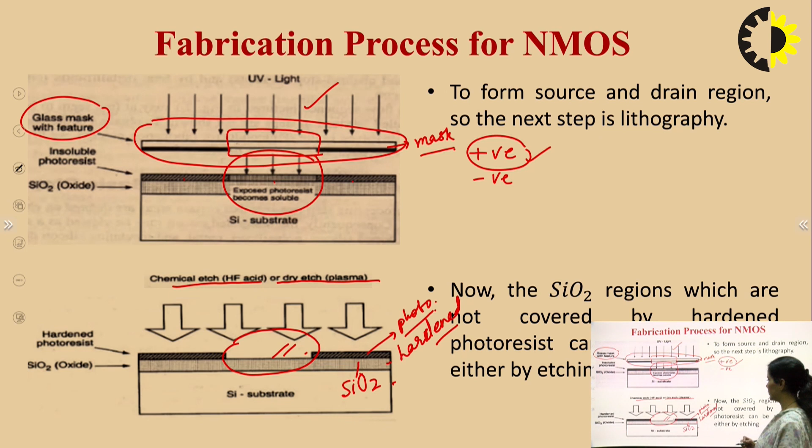Now the SiO2 regions which are not covered by hardened photoresist can be etched away. Finally, the photoresist layers on other portions are also being etched, so you can see there is no more photoresist. The remaining photoresist can be removed by using another solvent. So from all of the surface, the photoresist has been removed.

Now deposit a layer of thin oxide in order to form the gate oxide of the NMOS transistor. Now we have to fabricate the gate. For fabrication of the gate, we are already aware that a thin oxide film deposition has to be done. So again, through the thin film deposition process, a thin oxide is grown all over the surface, all over the SiO2 oxide.

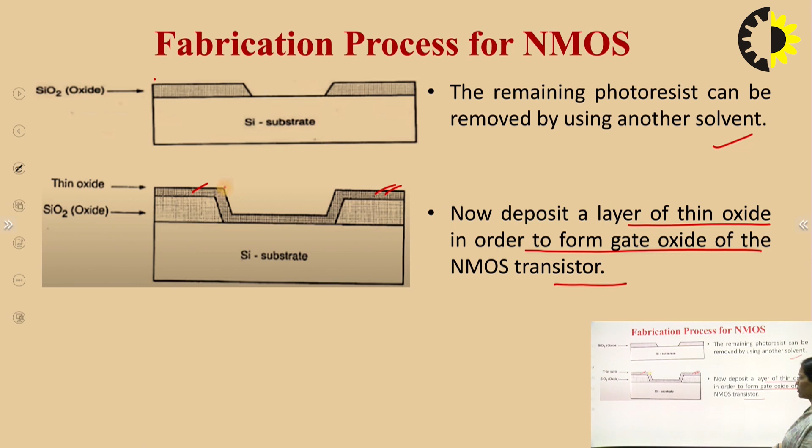Now on the top of the thin oxide layer, a layer of polysilicon is deposited. As we can see, this was the SiO2 thick oxide layer. Through patterning, the thick oxide layer has been removed from this portion. Now this is a thin film of oxide layer, thin oxide. Again, above the thin oxide, this is the polysilicon. And this polysilicon layer is used to make interconnects, to form the metallization.

So now on the top of thin oxide, a layer of polysilicon is deposited. It is used as gate electrode material for MOS and to interconnect it. So basically this polysilicon is used for making the gate electrode. Now through etching, we have to define the gate over here. So all the portions of the thin polysilicon layer except this portion are removed through etching.

So this is the final result. As we can see, in this particular portion where the gate has to be defined, we are left with the polysilicon layer. From all other portions, the polysilicon has been removed. So now this is the final structure. This is thick oxide, this is thin oxide, this is the thin polysilicon layer, only in this portion, because the gate electrode has to be defined only in this particular portion.

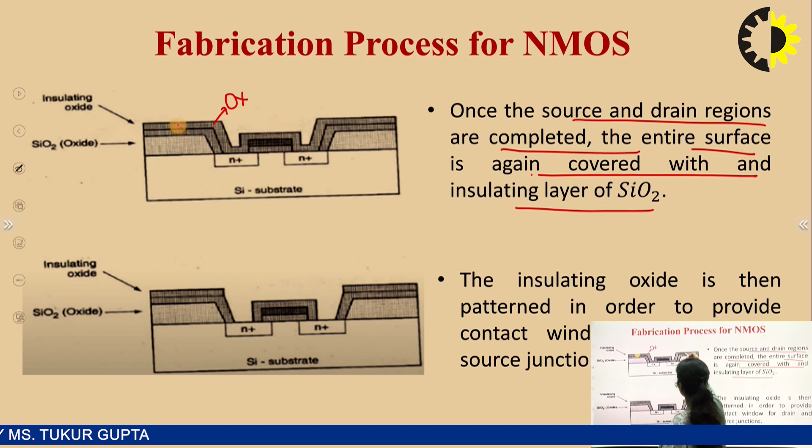So in this process, starting from the mere p-type substrate, we are now done with the two source and drain regions. Now what will be the next step? Next step is to make the interconnections of these regions. Once the source and drain regions are completed, the entire surface is again covered with an insulating layer of SiO2 to form the interconnections. So here we can see after the achievement of these two areas, again the insulating layer, that is the oxide layer, is grown all over the surface. So we can see here is the layer grown again.

The insulating oxide is then patterned in order to provide the contact windows for drain and source junctions. So here you have to open the contact windows. So for opening the contact window, what are we doing? We are etching the oxide layers from these two regions. This is the insulating oxide.

Now the surface is covered with evaporated aluminium, which will be used for making the interconnections. Now after this step, what are we going to do? We are going to cover this whole portion using the metal layer. So here this is the metal layer, and it is covering the whole surface. Now we have to make the openings for gate, source and drain.

Finally, the metal layer is patterned and etched, completing the interconnections of the MOS transistor on the surface. So in this way, only these areas are used to make the interconnections. The metal contacts can be seen only in these regions. So this is how the final product looks.

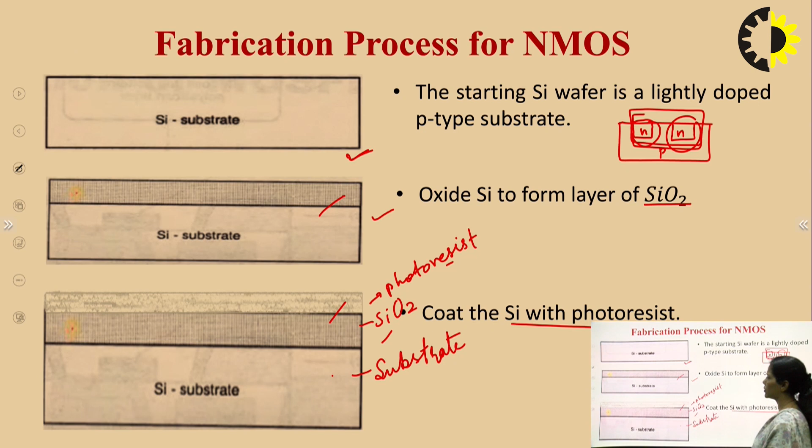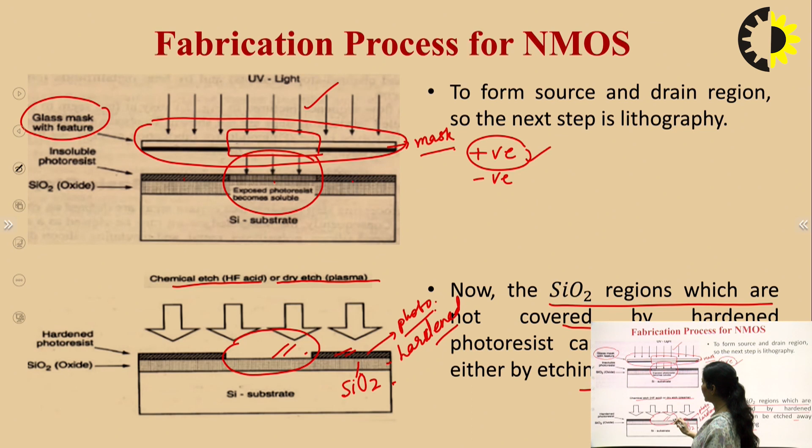Let us again give a quick recap. Starting from the substrate, first of all the oxide layer was grown, and then the photoresist layer was deposited. Then it was patterned to make the openings for source, drain and the gate regions. Now again the etching was done and the thin oxide layer was grown. On the thin oxide layer, again the polysilicon layer was grown to make the interconnections. And then it was used to form the gate.

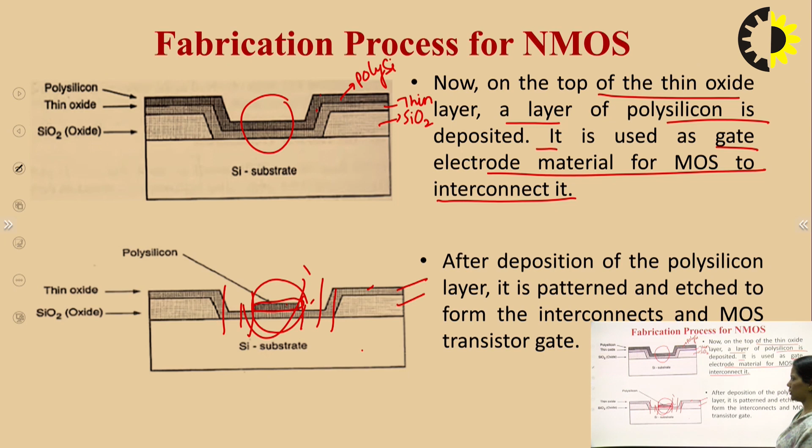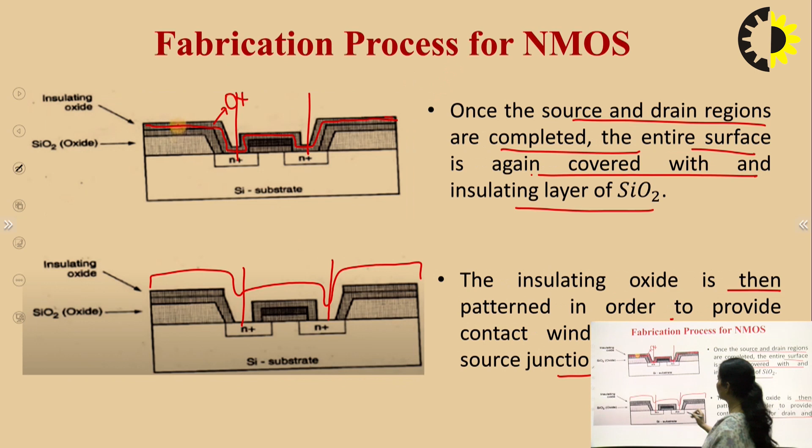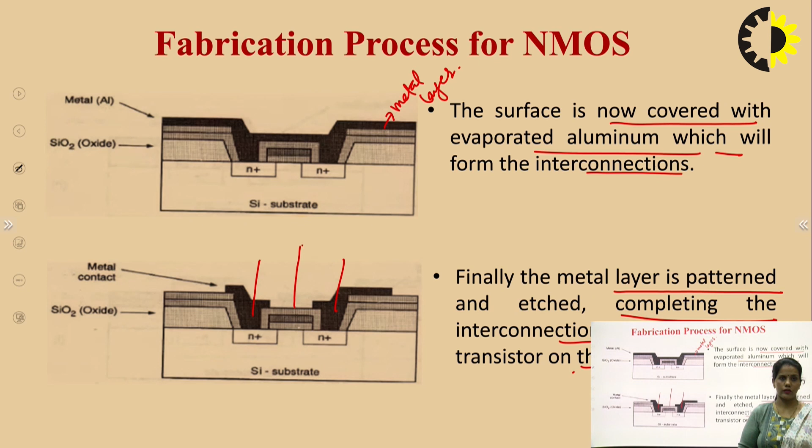So to make the gates, the oxide layer from the other regions is also removed. Now again, through these openings, source and drain regions are defined. After defining the source and drain regions, again the insulating oxide layer is grown in order to make the metallic contacts. After this oxide layer is grown, it is etched from these particular areas where the metallization has to be done. And in the final step, the metallic layer is deposited and again etched to give the external connections to these areas, source and drain. So this was the whole process of NMOS.

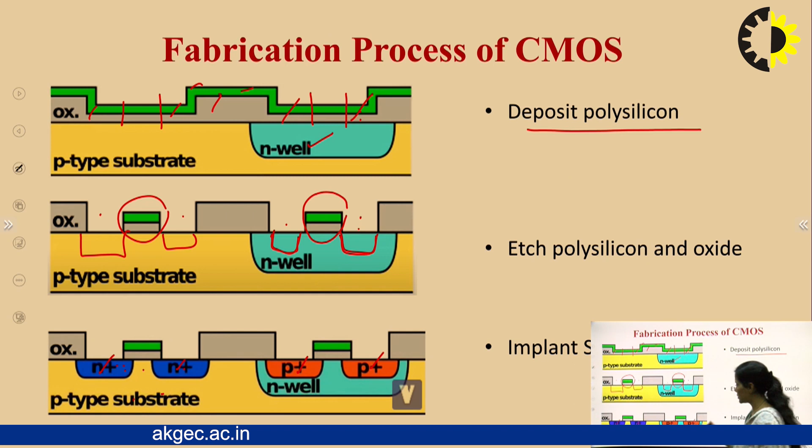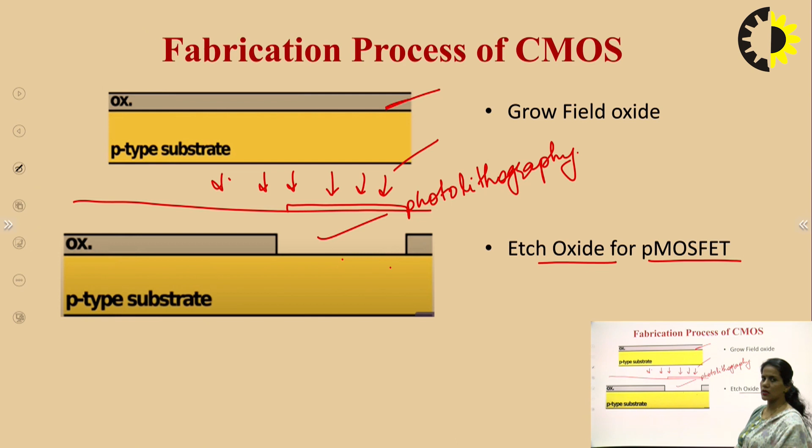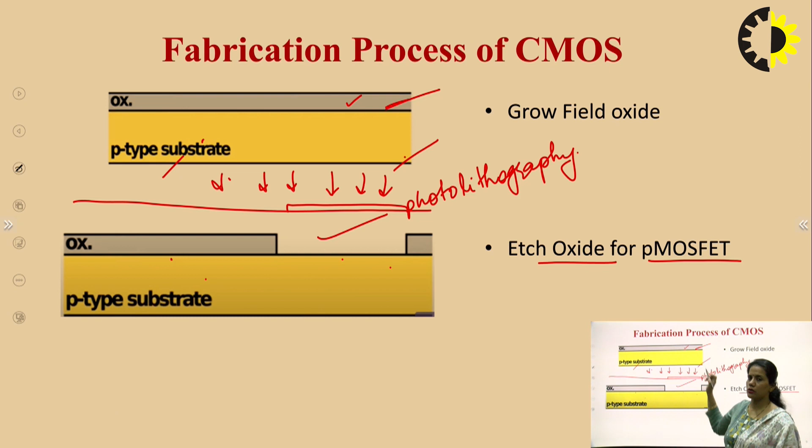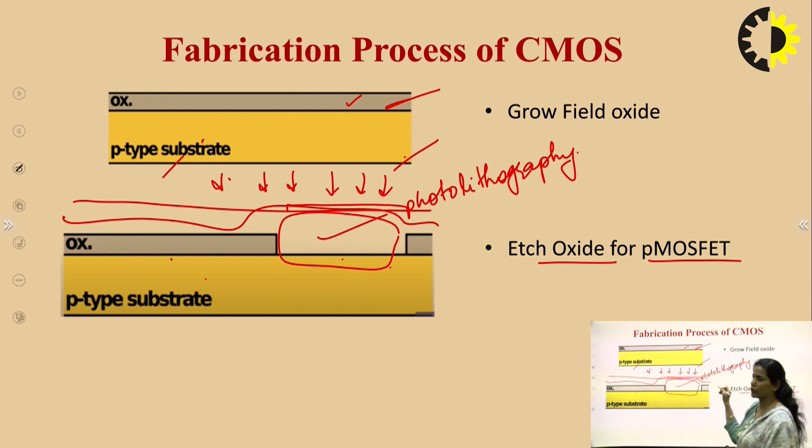So let's give a quick recap of the fabrication process of CMOS. Here the CMOS is fabricated on the P-type substrate, starting with the deposition of oxide layer on the P-type substrate. I have not shown this step: between these two steps, there is a process of photoresist deposition. A photoresist layer is deposited on the oxide layer, and after using the mask and patterning, the oxide layer has been removed from this portion, and in the final step the photoresist deposited on the surface has been removed.

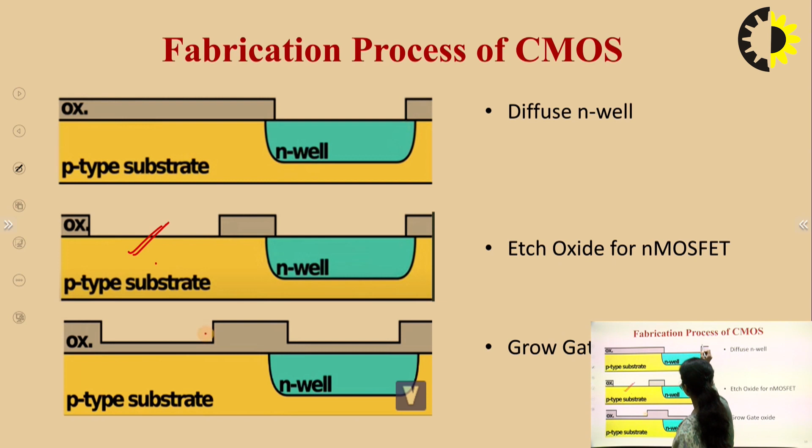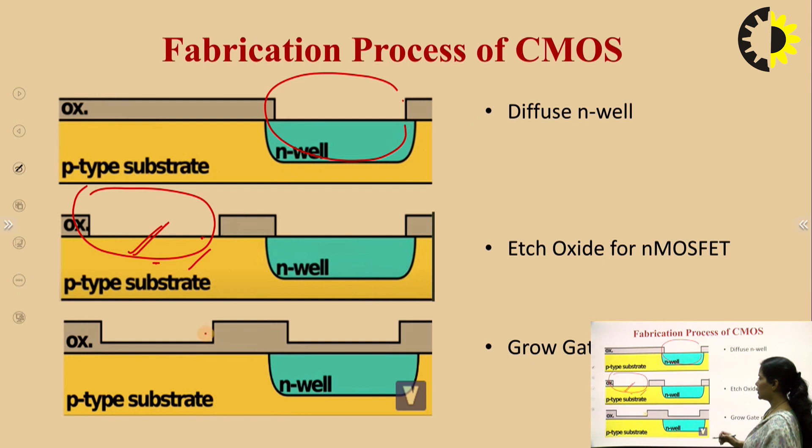So now we are left with the substrate, and we have an open portion over here in which the N-type well has been created using diffusion process. Again, in the second patterning step, this portion has been exposed and the oxide layer has been etched, which is used for making the N MOSFET. After depositing the gate oxide layer and polysilicon layer, etching is done to make the gate electrodes, and finally diffusion or ion implantation is used to create the source and drain regions in both P MOSFET and N MOSFET.

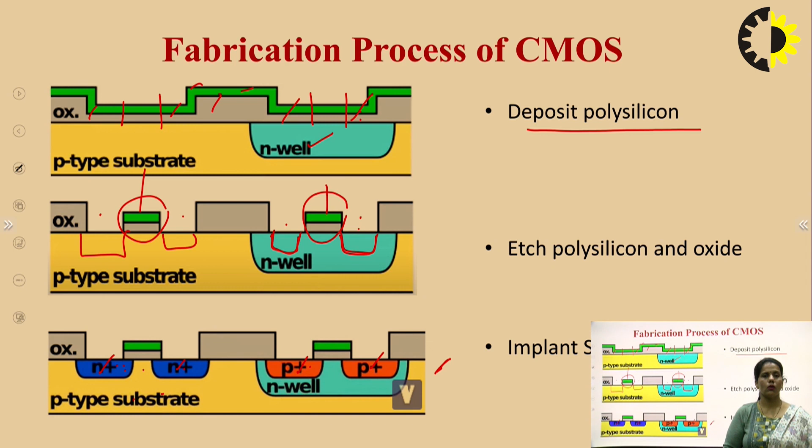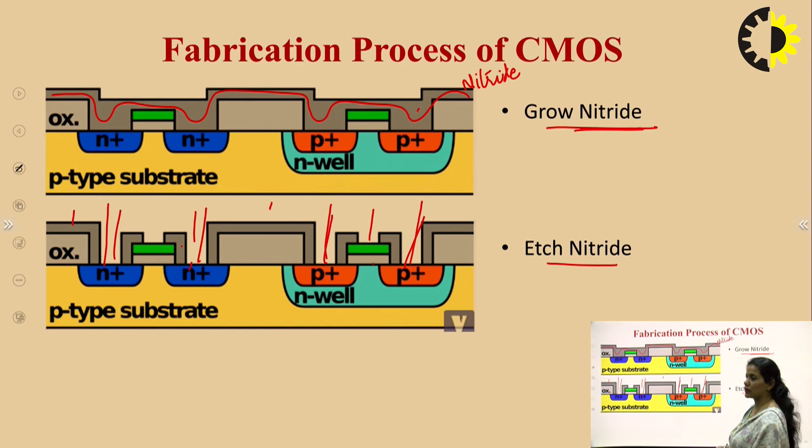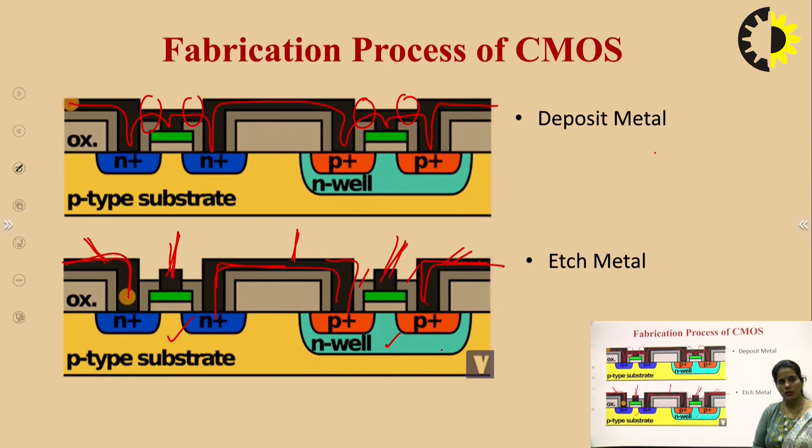After this, the nitride layer is grown before metallization, and after etching the nitride layer, the metallic layer is deposited all over the surface and etched to form the source, drain and gate regions, to give the interconnections to these regions. So this was the complete process for CMOS fabrication. So in this lecture, we have covered both the NMOS and CMOS fabrication sequence, and that was all for today's lecture.